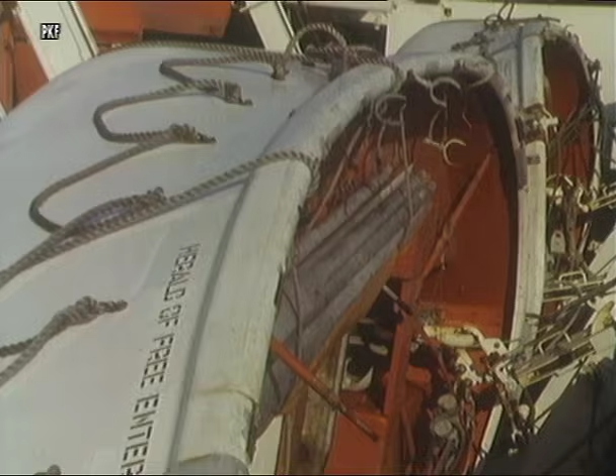Wings of the morning, or dwell in the uttermost parts of the sea, even there your hand shall lead me, and your right hand shall hold me. If I say, surely the darkness will cover me, and the night will enclose me, the darkness is no darkness with you, the night is as clear as the day.

Completely without warning, the Herald of Free Enterprise capsizes close to the Belgian coast on the 6th of March 1987. The ferry, owned by Townsend Thoresen, has just left Zeebrugge. On board the ship are 543 people and 145 vehicles, weighing about 1,100 tons as part of the cargo. The wreckage is found 3/4 of a mile north of Zeebrugge harbour, just outside the Fairway Channel.

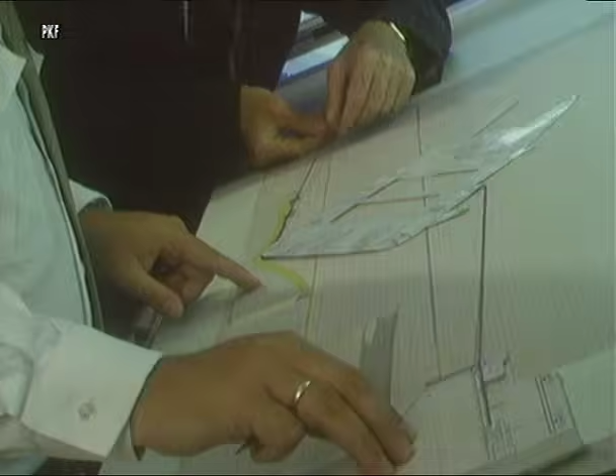Even before the salvage contract has been signed, Smit-Tak engineers at Rotterdam are working out a salvage plan. No other salvage company can mobilize the necessary equipment in such a short time as Smit-Tak does, in close cooperation with the URS Towage and Salvage Union of Antwerp. The Herald of Free Enterprise weighs 7,951 tons, has an overall length of 131 meters and a beam of over 22 meters.

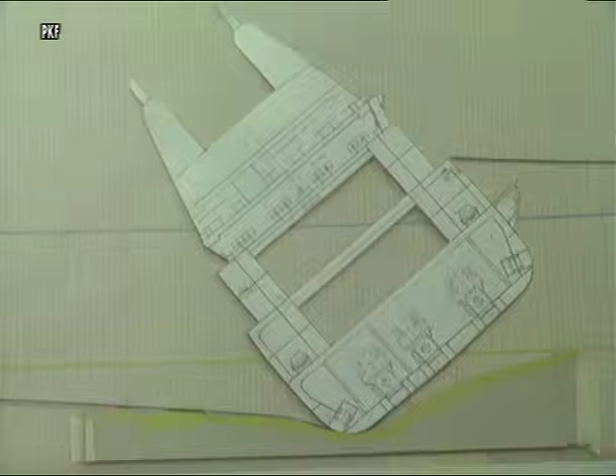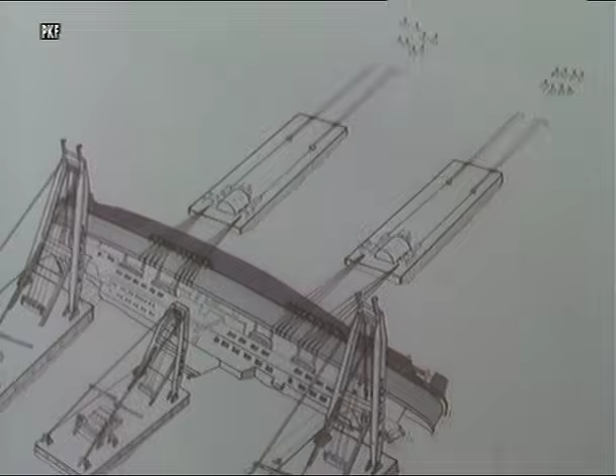With knowledge of these and other particulars, a scale model of the ship is made. This is vital so that it can be established how the capsized wreckage can be uprighted successfully. The lifting power of this operation will be provided by 3 shear legs and 2 pull barges, with a total lifting and pulling capacity of over 10,000 tons. About half the wreckage is visible above sea level. At low tide, the water depth at this particular spot is over 11 meters. The ship's hull plating appears to be intact.

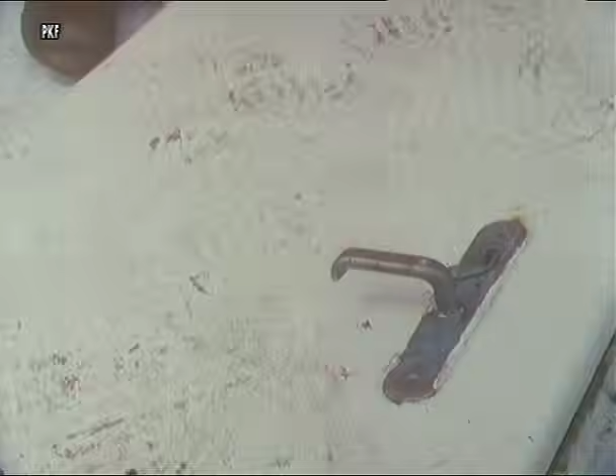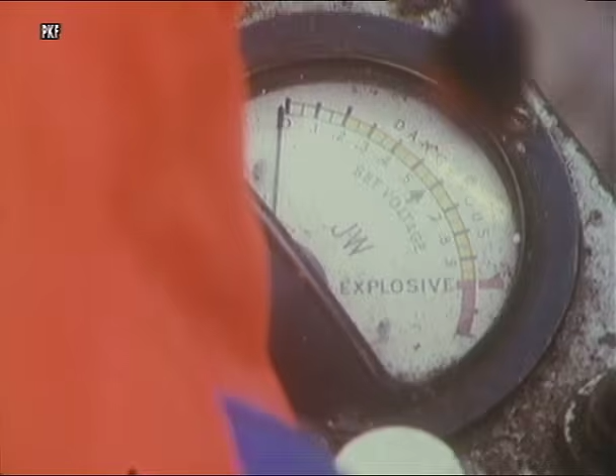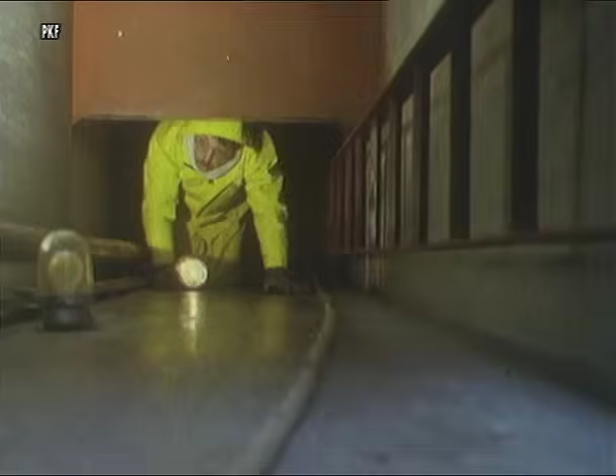With dense, reeking gases escaping from the ship's hold, it is not known exactly what cargo the vehicles have been carrying. Chemical experts enter the wreckage to determine the composition of the fumes. They find no immediate hazardous circumstances. It is difficult to find a way inside the capsized ship, in which stairways are now in a horizontal position. A part of the cargo of the upturned trailers is floating in the ship's hold.

Water samples are taken in many parts of the ship. They will be examined for toxicity and radioactivity. Silent evidence of a tragedy is everywhere. Within hours of the tragedy, the international press is on the scene in great force to report the disaster.

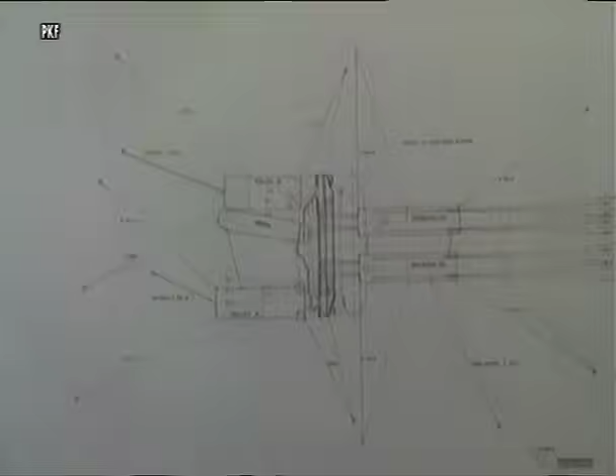32 points. 100 tons. Senior Salvage Superintendent Hans Vollenkamp explains the method chosen by Smit to upright the vessel to journalists and authorities at a press conference. So you see there's 32 points here we designed during the weekend, our technical department in Rotterdam. At this moment we are that far that the first strong points have arrived this morning, so we'll start this afternoon at least with all the necessary preparations to weld on those strong points. So that's the connection as far as the ship is concerned.

The welders have arrived, the welding equipment has arrived. We are loading it now on our salvage vessels here in Zeebrugge, and they intend to go out within 1 or 2 hours. Providing the weather conditions remain good, men will work day and night around the clock on the casualty. The first thing to do is to weld 32 strong points to which wire slings for the pull barges can be attached.

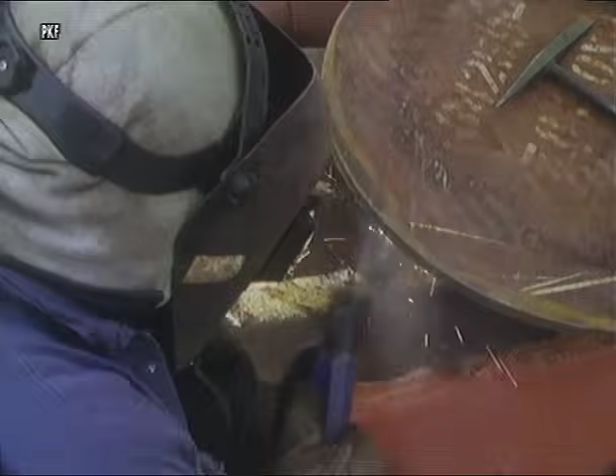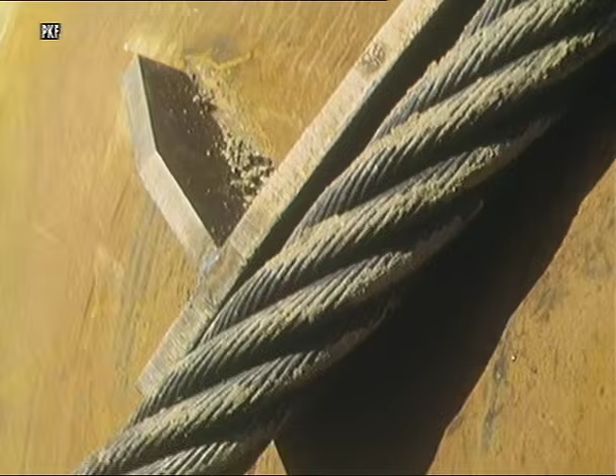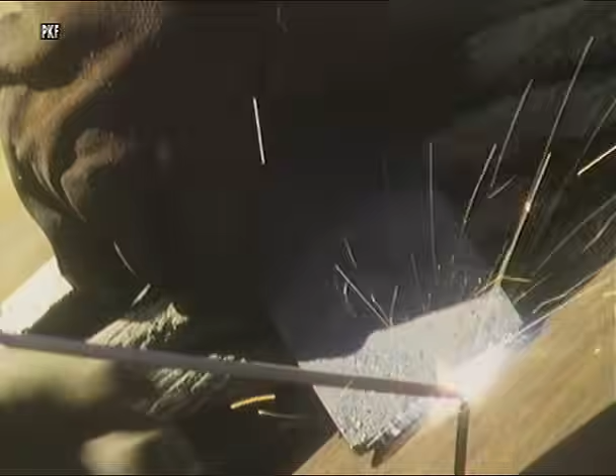Because of the seabed conditions, the pull barges Tak 31 and 32 will be secured by means of 16 piles driven down into the seabed. These piles are in fact steel pipes which are used for transport of liquid gas. They are 142 centimeters in diameter and have a length of 30 meters. Before pile driving can begin, wire slings have to be attached to the 16 piles. The piles will be driven down with the wire sling into the seabed at a depth of approximately 17 meters. In the history of salvage, this is only the second time that piles have been used for such a purpose.

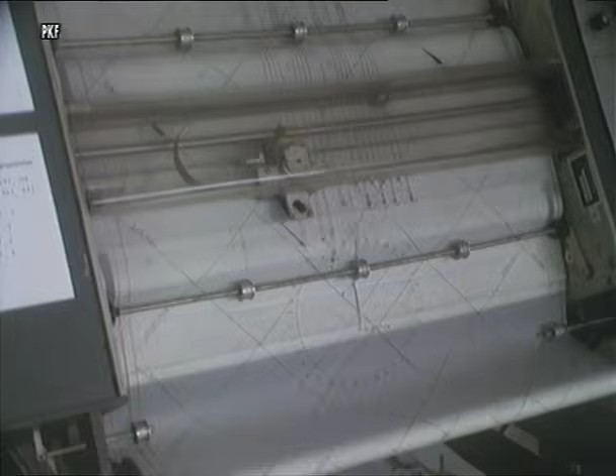The floating shear legs Norma has been designated for this job. On board ship, the exact location of each pile is carefully checked with accurate positioning equipment. This is of the utmost importance, as there must be a proper distribution of the enormous power needed to upright the Herald of Free Enterprise. Each pile must resist a force of 200 tons. Throughout the salvage operation, samples of water are taken. It appears that there is no immediate danger.

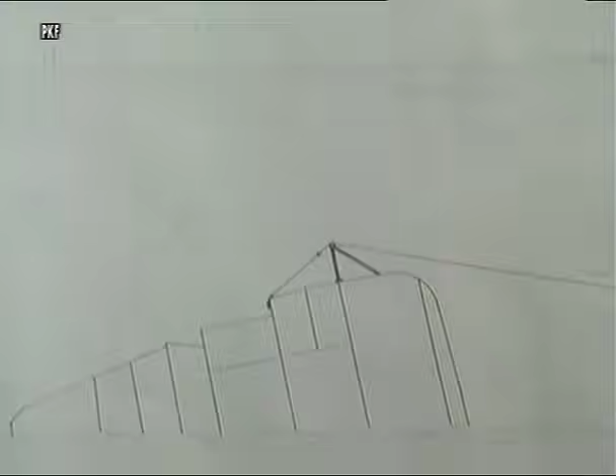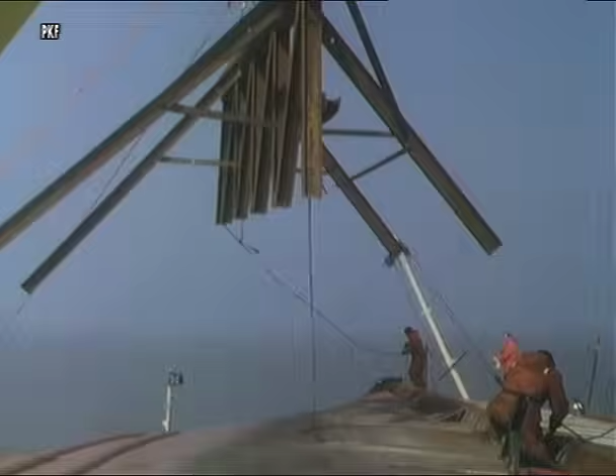With sudden drops in temperature due to icing, working on the Herald becomes a risky business. To divide the forces as much as possible, we will install cantilevers in the way of the main deck on the upper hull side. Although the sea remains calm and there is little wind, it is difficult to position the violently swinging 12.5 meters long cantilevers.

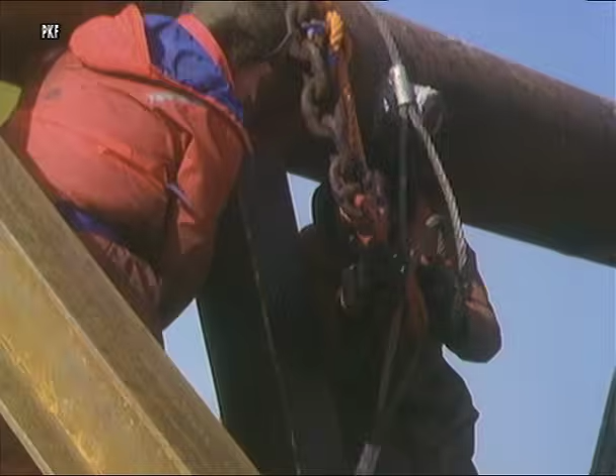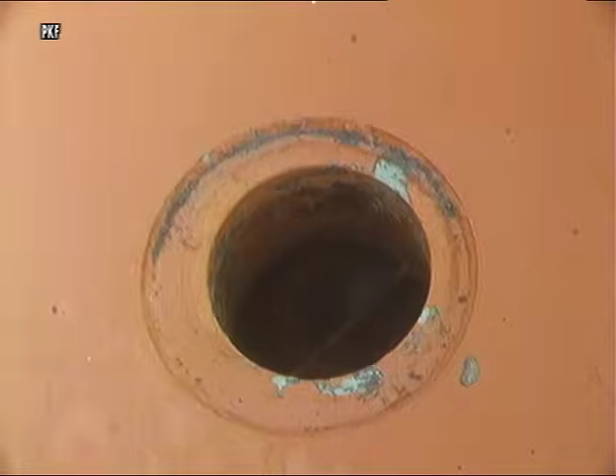Ten welders work day and night to attach these cantilevers. Exhaust pipes and scupper valves in the hull plating have to be sealed with concrete and wooden plugs, as they will be below the waterline once the wreckage is upright again. And then, due to bad weather, the welding of cantilevers has to be halted. But on March 26th, 20 days after the disaster, this work is completed. Dense fog sets in. However, welding and other activities continue.

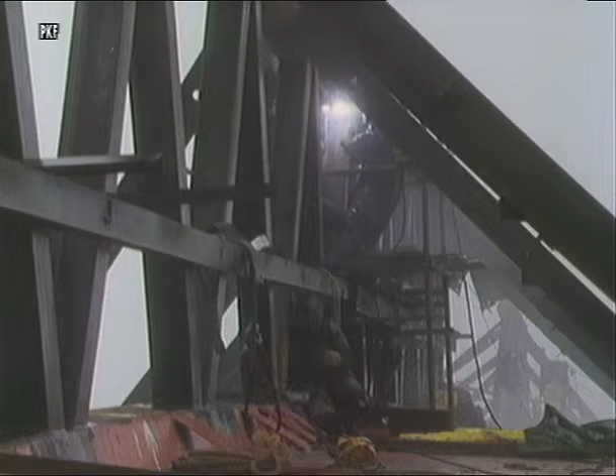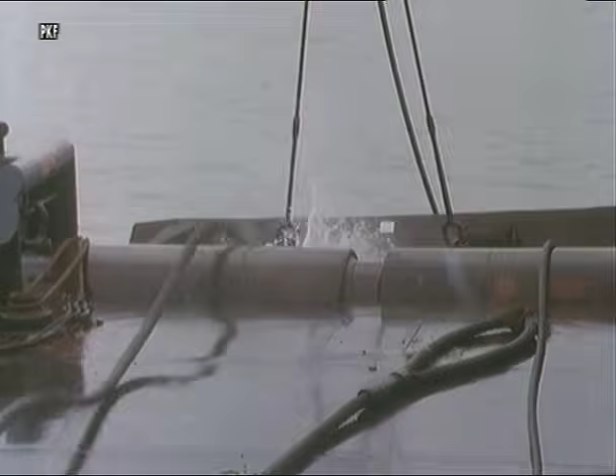In the meantime, 10 reaction anchors, each weighing 15 tons, have arrived from Smit-Tak warehouses in Rotterdam. The salvage vessel, Smit Orca, will position the anchors, which will prevent the casualty from moving sideways. Wires for reaction anchors will be installed around and underneath the hull of the vessel. In bad visibility, the Smit Orca transports the reaction anchors one by one to the site, carrying them below the stern. Without radar, such a task would be impossible. Due to bad weather, the positioning of the anchors takes 5 days.

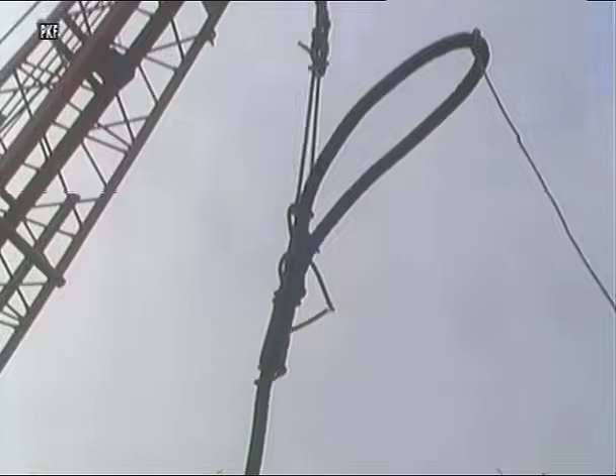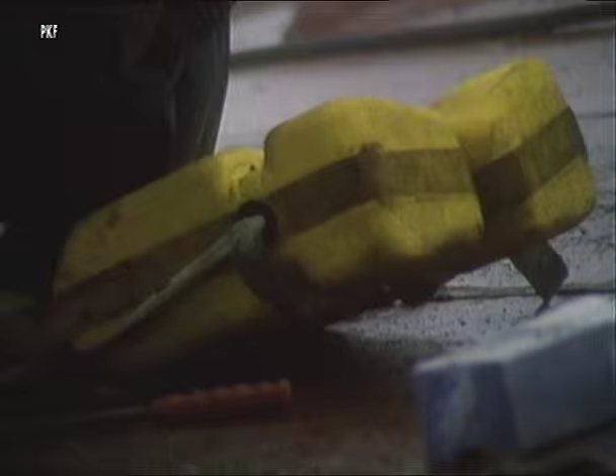To carry out this job, the Smit Orca is assisted by the salvage vessel Deurloo, which pulls anchor wires under and around the wreckage. The Deurloo brings the anchor wire to the wreckage, where it is secured to a strong point. The Smit Orca drops the anchor after the wire has been tightened. In the meantime, the welding continues. In the end, the welding at construction required a total of 3,500 man-hours.

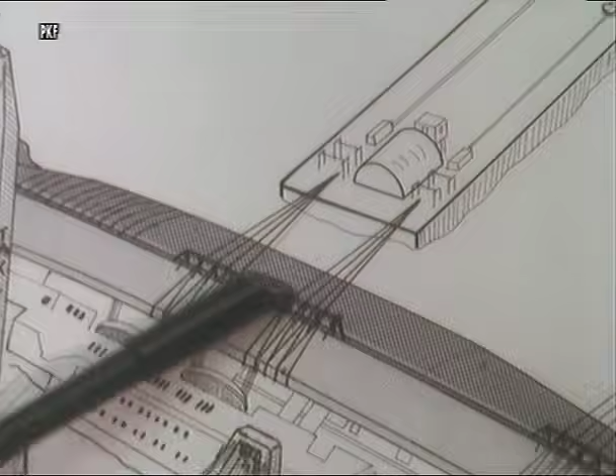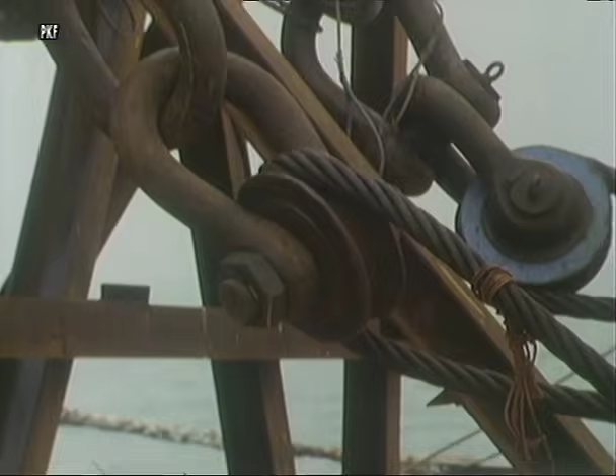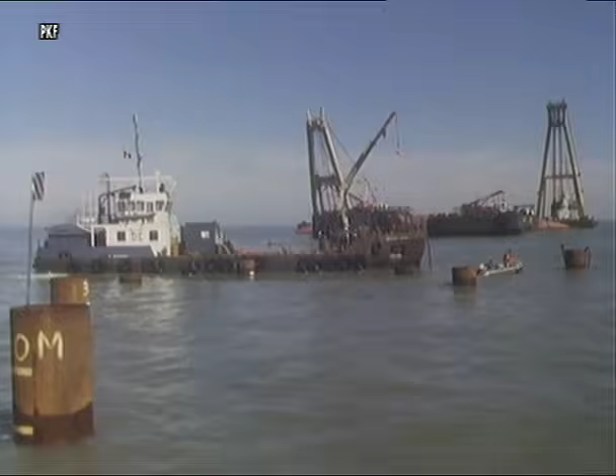It takes till the early evening to connect pull wires from the Herald to the barges. These steel wire ropes have a diameter of over 9 centimeters. A total length of about 6 kilometers of steel wire rope is finally used to salvage the ship and stabilize her in an upright position. The 16 piles are now connected to the pull barges with the wire ropes, each rope measuring 140 meters. Their diameter is over 9 centimeters. A shackle like this weighs over 230 kilos.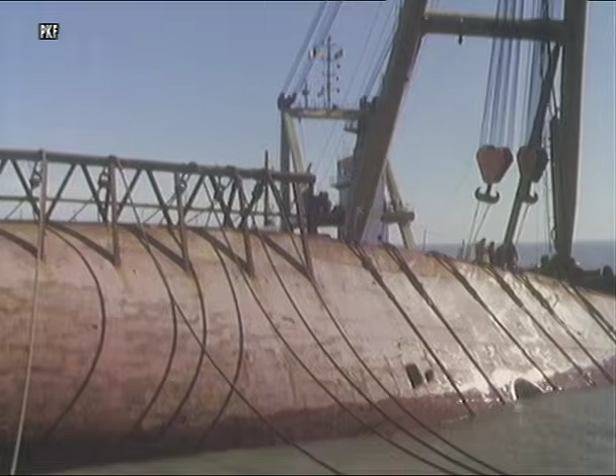Finally, the day comes when all wires are attached and the uprighting of the Herald can commence. At wind force 2 to 3, the sea is calm, but the weather is going to deteriorate shortly according to the forecast. It has been decided to start the uprighting operations in the early morning of April the 7th. The operation is controlled from the commander's cabin on board the pull barge Takbarge 32. In close proximity to the wreckage, both barges and 3 shear legs are in position to pull and to hoist simultaneously.

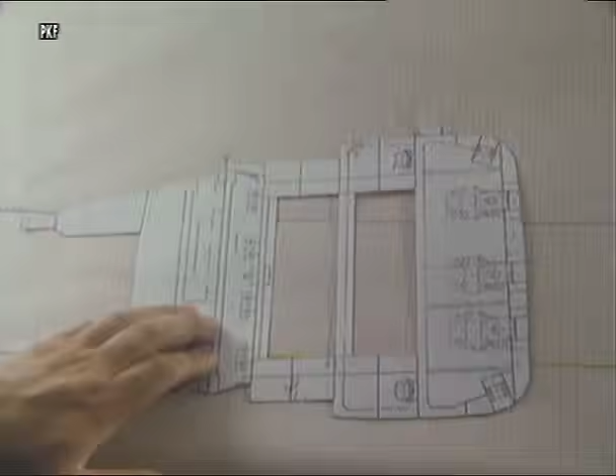Okay. A scale model of the wreckage is used to register the progress of uprighting.

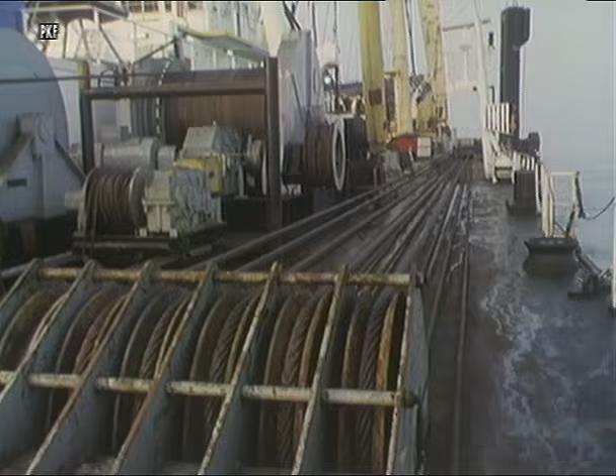Deck tackles on Taklift 4 and 6 increase the lifting capacity of both shear legs up to 4,000 tons. At 8:20, the uprighting operation begins. The weather conditions are still favorable. The wind is force 2 to 3.

Gradually, the drag force by the pull barges is increased to 2,320 tons during the operation.

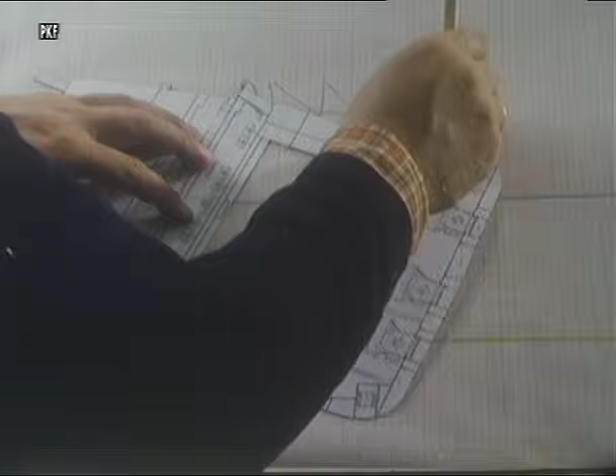Slowly, but surely, the ship rises into her normal position.

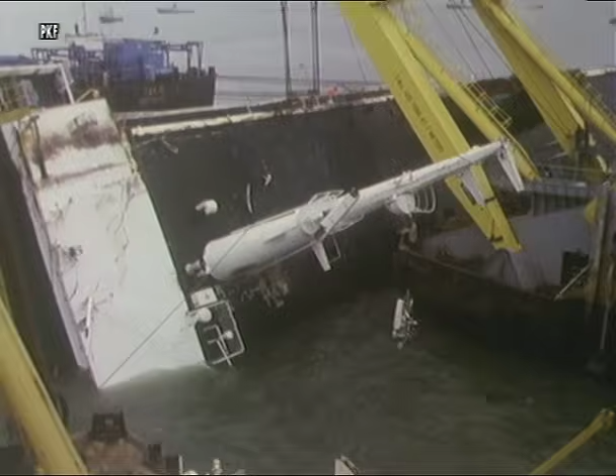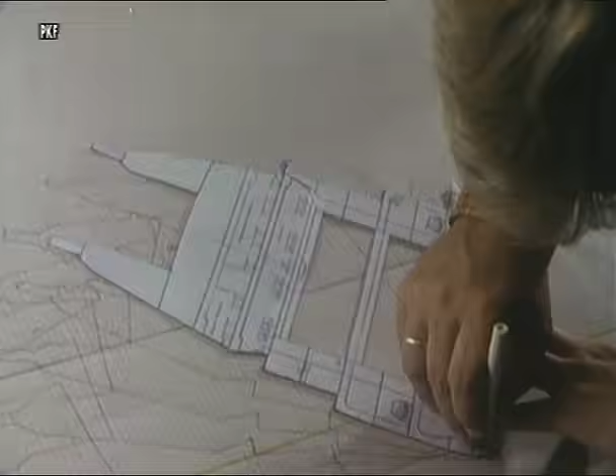The shear leg's Norma is released as her contribution in the critical construction phase is now over. The red ensign appears above sea level. As the hours pass, the ship returns to the vertical position meter by meter.

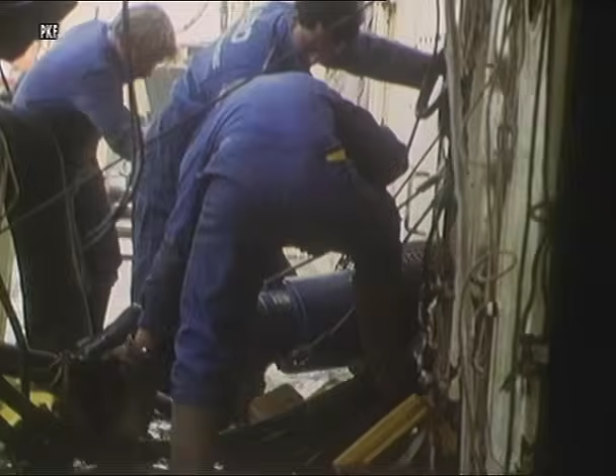Windows and doors which have been smashed during the gales first have to be patched with wooden boards. At the same time, pumps are installed and positioned all over the ship. As the pumps go into operation, 5,000 tons of water per hour is pumped out of the wreckage.

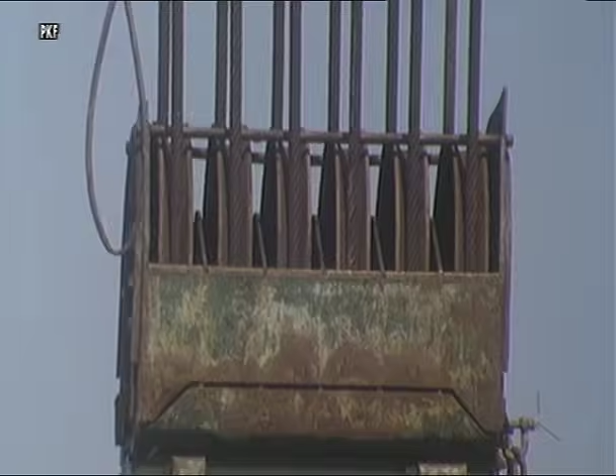During the operation, the shear legs assist in lifting the ship, and as the stability is critical, also keep her in a vertical position. Each Taklift is able to develop a lifting capacity of 1,200 tons.

The lifting wire slings are now attached to the vessel, some leading from port to starboard and the others from starboard to port, thus equalizing the forces on both sides. In the lower compartments of the ship, the water level gradually subsides.

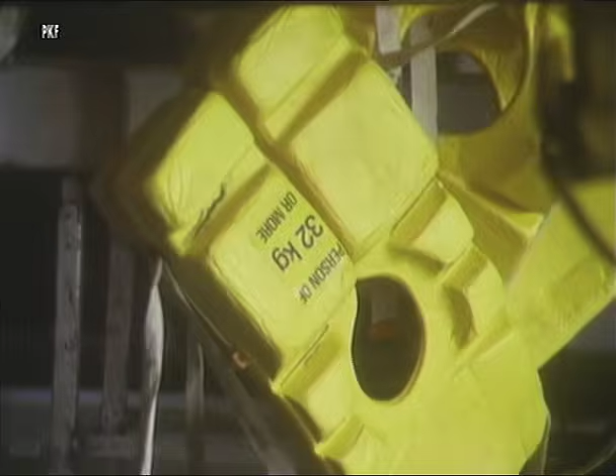The final phase of the operation is when the Herald of Free Enterprise is brought to rest in a Flushing shipyard. It is accomplished.